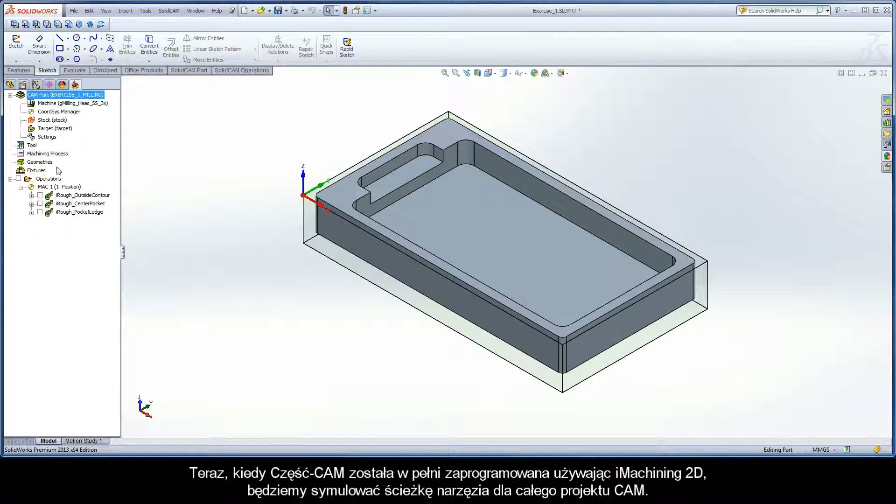Now that the CAM part has been fully programmed using iMachining 2D, simulate the iMachining toolpath for the entire CAM project. Right-click the operations header in the SolidCAM Manager and select Simulate.

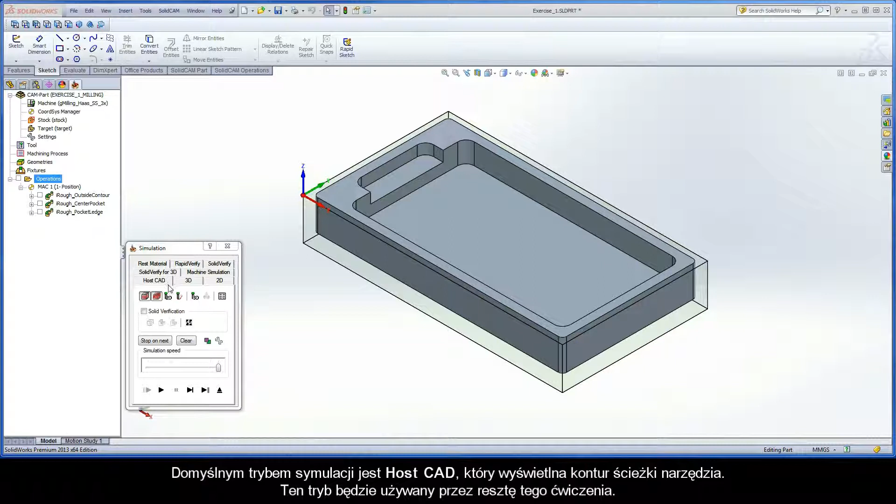The simulation control panel is displayed. It enables you to view the iMachining toolpath using several different modes, handled by these tabs. The default simulation mode is Host CAD, which displays the iMachining toolpath as a wireframe. This mode will be used throughout the exercise.

If the Show Tool 2D option is selected, the tool will be represented during simulation as a wireframe circle. Click the Show Trail and Show Tool 3D buttons. During simulation, these new features will be shown in the SOLIDWORKS window.

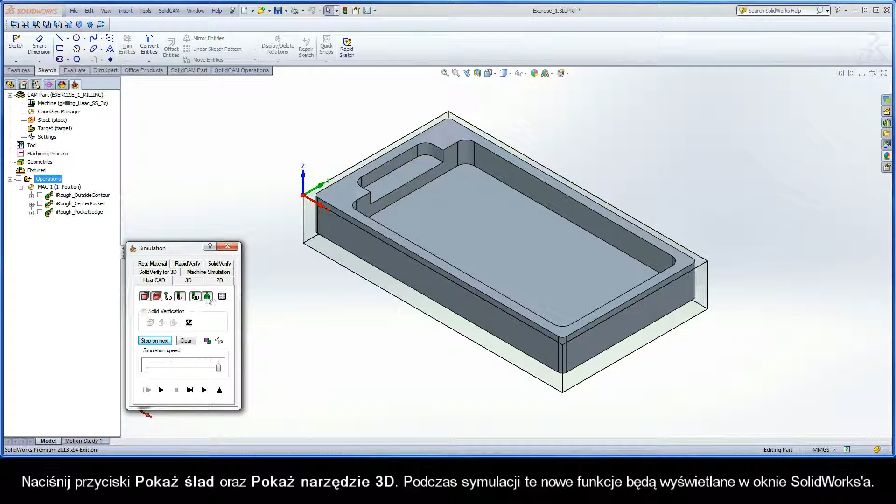Also, click the Show Data button. The simulation data window appears and displays the X, Y, and Z position of the tool, the current feed and spin rates, and the time it takes to machine this CAM part.

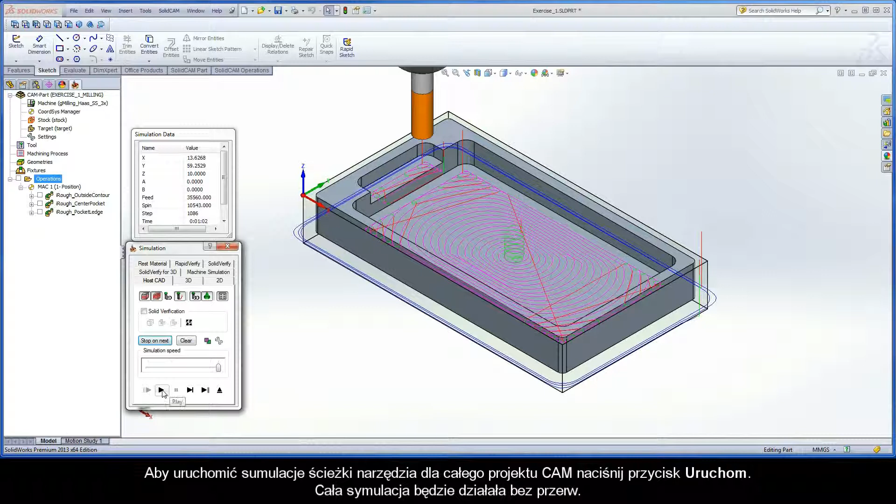To start the iMachining toolpath simulation for the entire CAM project, click the Play button. The simulation runs entirely without stopping.

Note that you can control the simulation speed with this slider. Moving the slider to the left will decrease the speed of simulation, while moving it to the right will increase the speed. Slow the simulation speed down, and then click the Play button again. The simulation runs at a slower rate.

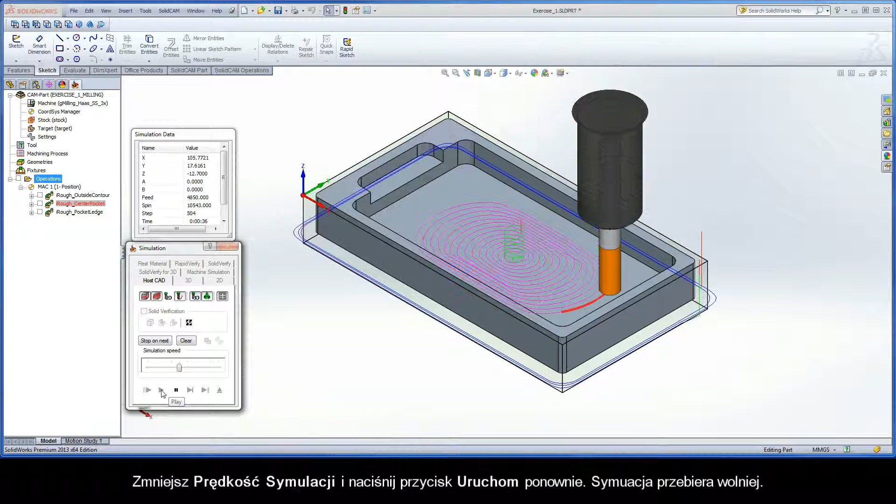There are two other simulation playback options that can be used. The Single Step Mode button enables you to move the tool through simulation one step at a time with each mouse click. Each related movement can be viewed in the simulation data window.

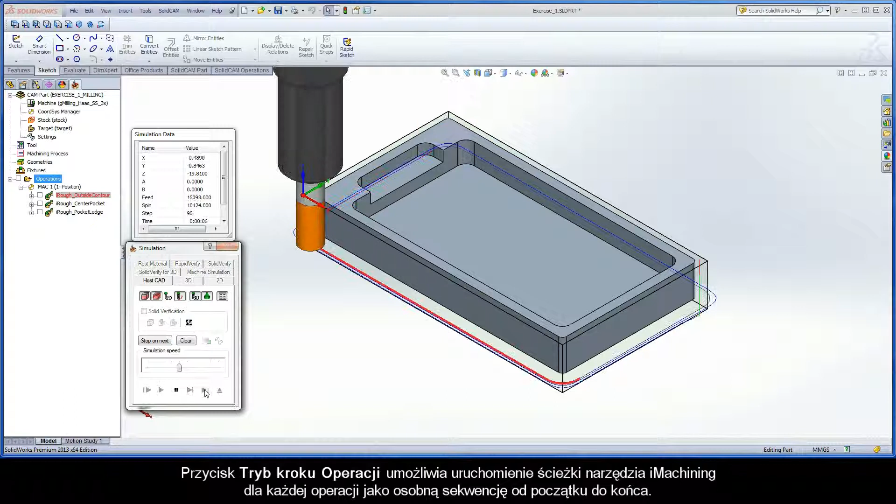The Operation Step Mode button enables you to play the iMachining toolpath per each operation in sequential order, from beginning to end.

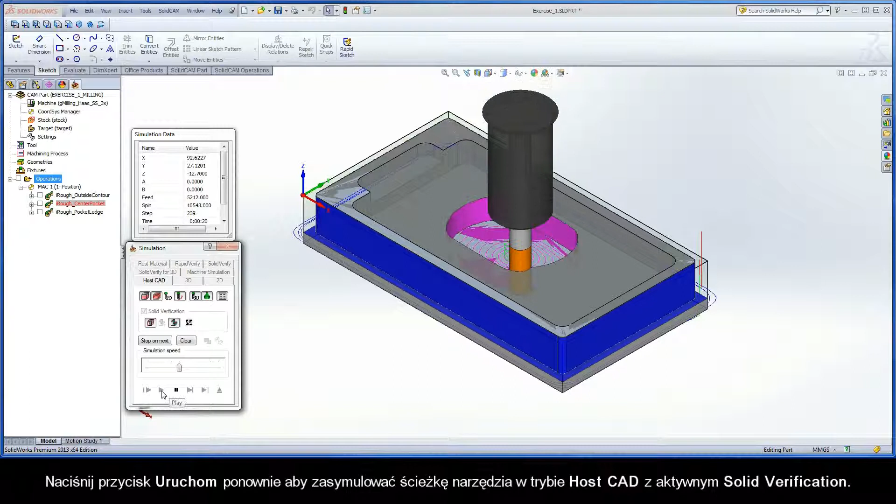By enabling solid verification, SolidCAM will perform a solid verification of the iMachining toolpath from within the SolidWorks window. Click the Play button once more to simulate the iMachining toolpath in Host CAD with solid verification enabled.

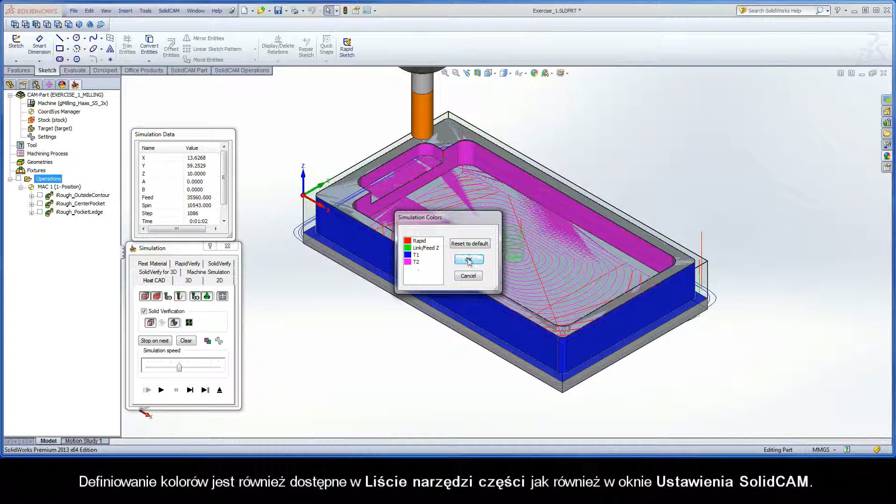Click the Colors button to display the Simulation Colors dialog box. This dialog box enables you to define a specific color to each toolpath that is represented visually during simulation. Color definitions are also available in the Part Tool table as well as in the SolidCAM Settings dialog box. Click OK to close the Simulation Colors dialog box.

Click the Settings button to display the Simulation Settings dialog box. This dialog box enables you control over the simulation options within HostCAD.

Next, switch to the SolidVerify tab. This is another mode of simulation that will be used throughout the training course. SolidVerify enables you to view the cutting tool as it moves through the solid stock material.

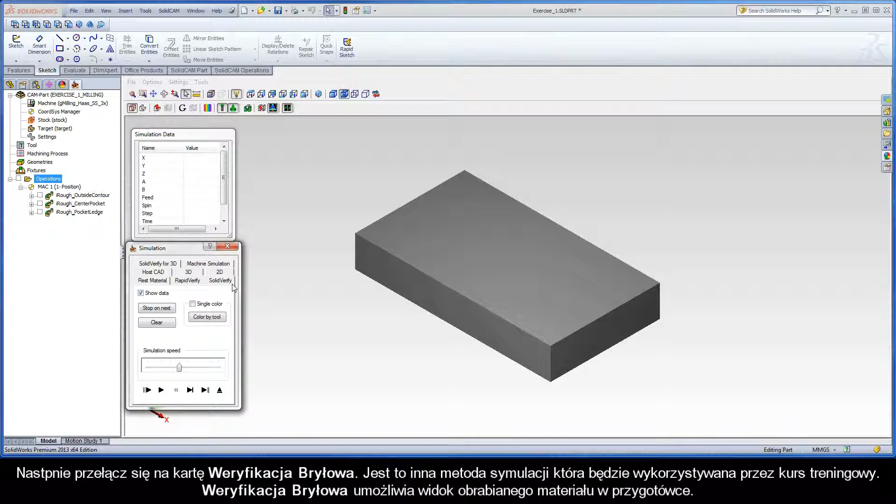During this machining simulation process, SolidCAM subtracts the tool movements from the solid model of the stock defined in exercise number 1. The remaining machine stock is a solid model that can be dynamically zoomed, moved, or rotated. It can also be compared to the target model.

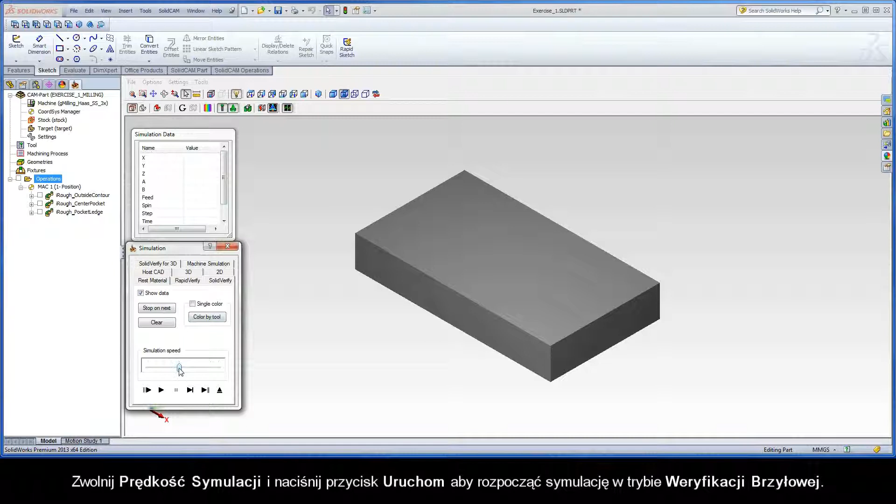Slow the simulation speed down, and then click the Play button to run the simulation in the SolidVerify mode.

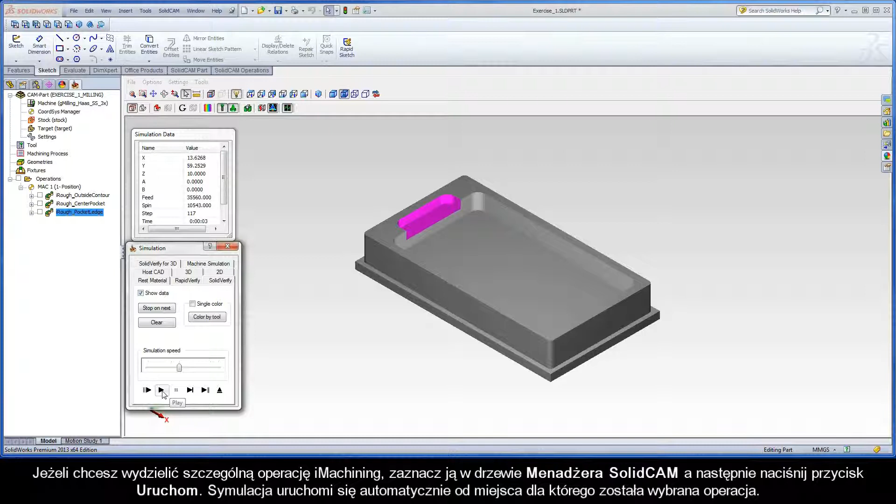If you want to single out a particular iMachining operation, highlight the operation in the SolidCAM Manager tree, and then click the Play button. The simulation will start from the beginning of the selected operation. Note that the part model was automatically updated according to the selected operation, and all operations shown up to that point are a single color.

After clicking the Play button, the simulation can be paused during playback, and then played again after selecting a different operation in the SolidCAM Manager tree.

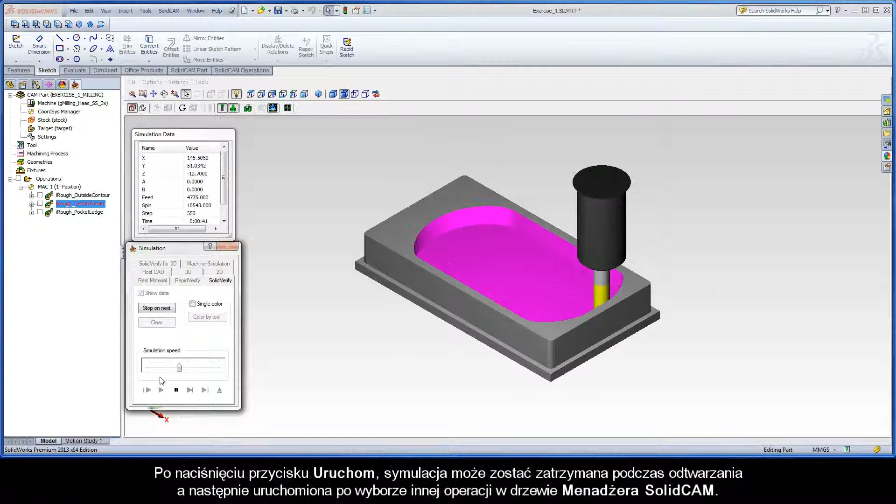Click the Stop on Next button in the Simulation Control Panel. The Stop on Next dialog box is displayed and enables you to define specific points to stop the simulation process.

For example, check the Tool Change option and then highlight the operations header in the SolidCAM Manager to run through the simulation in its entirety.

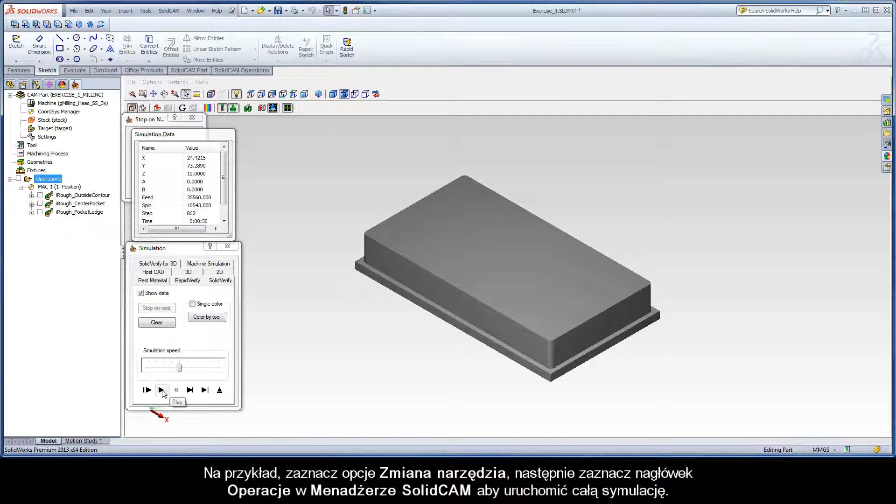Click the play button. Note the simulation will begin playing and pause after the first iMachining operation. This is because the first operation uses Tool 1 and the remaining operations change to Tool 2.

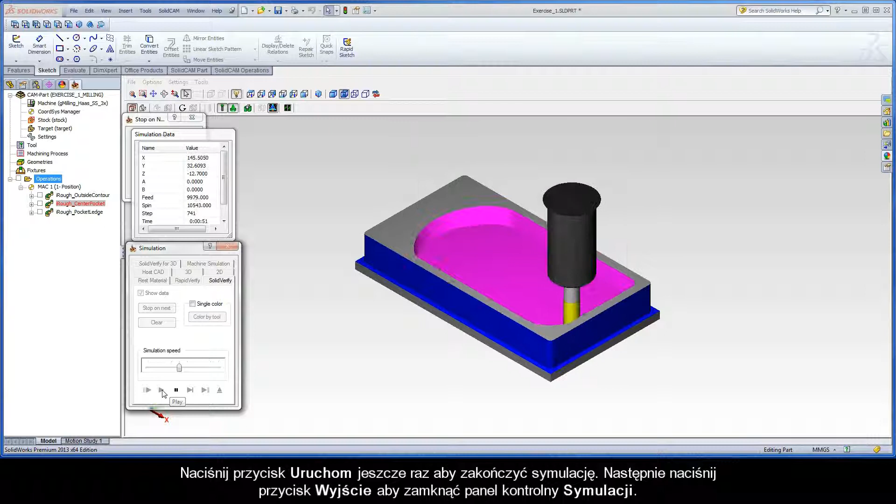Click the play button once more to finish running through the simulation. Then, click Exit to close the simulation control panel.

At this stage, Step 5 is complete. In the next step, the CAM project will be prepared for cutting on the CNC machine.

If you have not followed along, apply and practice the procedure shown in this video to simulate the CAM project using several SolidCAM simulation methods.